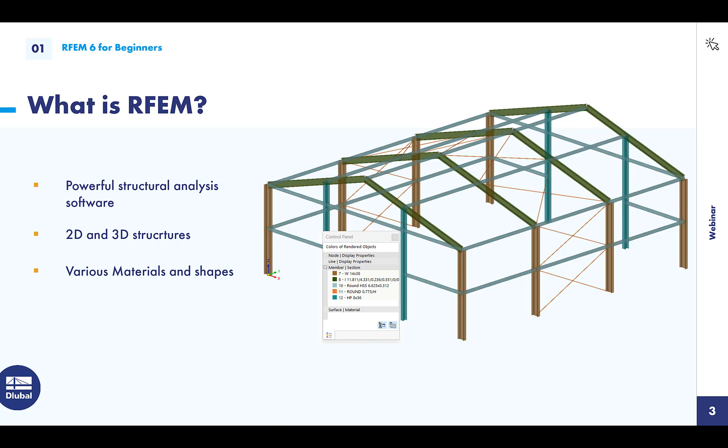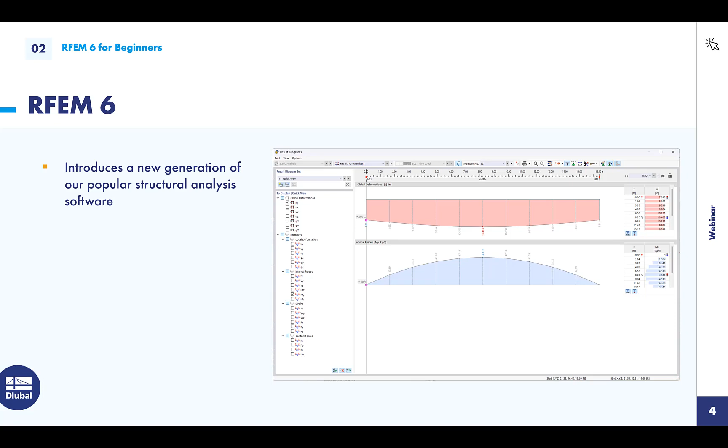RFEM 6 introduces a new generation of our popular structural analysis programs. Thus, you can expect powerful, simple, and intuitive tools for your daily tasks. As you know, our goal is to provide the best results for our customers and stay true to the slogan, Enjoy Structural Analysis. RFEM 6 offers a great variety of changes and improvements that make modeling faster and more enjoyable.

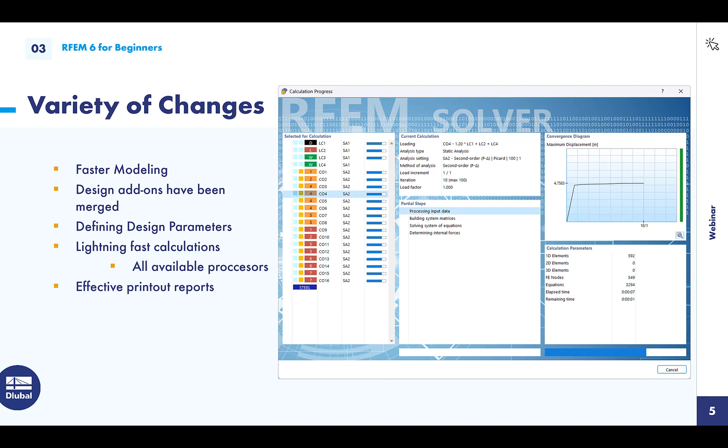For example, we have merged the design add-ons with the software. In this way, you can define certain parameters of the design during the modeling process to save time, and you can create lightning-fast calculations and effective printout reports. For this, the program uses all of the available processors that your computer has.

Our online course consists of around 20 chapters. These videos will consist of modeling a simple 3D steel hall and performing the calculation and design for the structure. First, we will start with the installation, and then we will create a new model and go through the base data, and this will also consist of getting to know the user interface.

We will dive into modeling and discovering the new functions of RFEM 6. Afterwards, we will load the model and use our popular load generators. As soon as we're finished with loading, we will take a look at the results, perform various steel designs, and then finally the documentation of the results will be generated, and we will go through how to improve the printout report and learning its purpose.

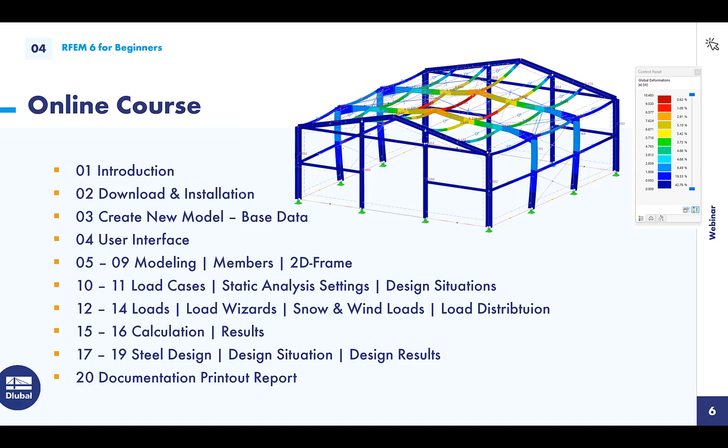To retain as much information as possible, we recommend that you model along with these video tutorials. You can also pause the videos at any time and go through the individual steps again.

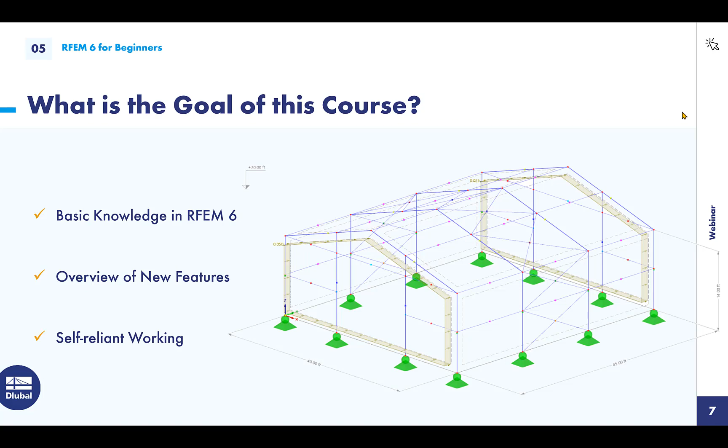What is the goal of this course? The aim of this online training is for you to gain basic knowledge in RFEM 6 and to be able to quickly find your way around the new features of this software generation, and also to be able to reliably carry out simple designs on your own.

Thus, this video series is not only suitable for beginners, but also advanced users who are experienced and also want to gain more insight into RFEM 6.

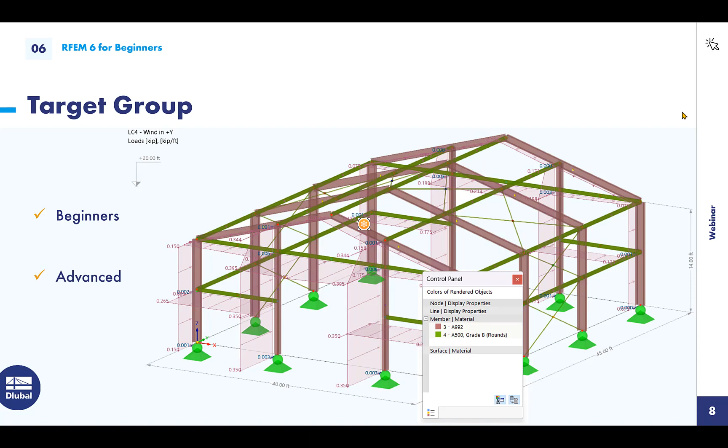If you don't already own RFEM 6, you can download the 90-day free trial from our website, and for students, RFEM 6 is free.